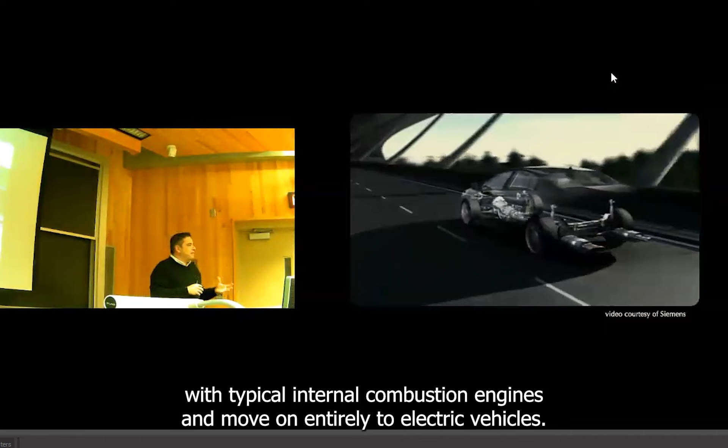Our world is changing, and one particular sector that undergoes significant transformation is transportation. We're about to depart from conventional vehicles with typical internal combustion engines and move on entirely to electric vehicles. This transformation will provide several challenges and also opportunities. We have the challenge to upgrade our existing transportation network with efficient charging stations to charge all these electric vehicles. We have the opportunity to create technologies that can handle the increasing demand of electricity from all these vehicles. We have the opportunity to integrate these vehicles with commercial and residential buildings so that we can eventually have off-grid buildings. And on top of that, we have the introduction of connected and automated vehicles with shared information.

Using this shared information, we can improve the transportation efficiency and also reduce energy. So if you look at all these applications, there is a common theme: we have a cyber component, which is data or information that we use to control the physical entity. So we have a typical cyber-physical system.

So now you might wonder why we need to focus so much on transportation. Well, in 2017, the US alone consumed on average 19.6 million barrels of petroleum, and transportation accounted for 71% of that usage. If you think about it, this is enough fuel to fill up the entire building over two times per day just to propel the vehicles. So you can see the impact of transportation in oil displacement.

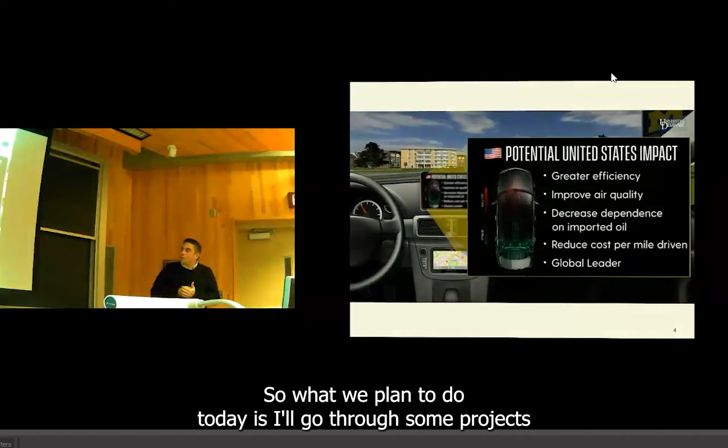Now, with the introduction of connected automated vehicles, we have significant opportunities to use connectivity and automation and improve the efficiency of the vehicles, and so account for this impact of transportation. So what I plan to do today is go through some projects that I have worked on over the past years in learning and control, applying to propulsion systems and also connected automated vehicles.

Through this path, I will try to highlight the challenges of learning and model-based control. And then at the end, I'll try to convince you and make the case that if we combine learning and control, we are better off in this particular case.

Before I get started, let me acknowledge the contributions of my students in the IDS lab. In my lab, we develop control algorithms and theories that we can use to make cyber-physical systems able to realize their optimal operation while interacting with the environment. The focus is mainly on transportation and emerging mobility systems and smart cities. To validate our work, we have built a scale smart city.

This is a 20 by 20 feet, or 6 by 6 meters if you are familiar with SI units. We have about 50 cars, everything in scale 1 to 24. We have cars and drones, and we can use this testbed to go one step further from simulation. We can test some of the algorithms in different scenarios, and prove concepts for different transportation concepts.

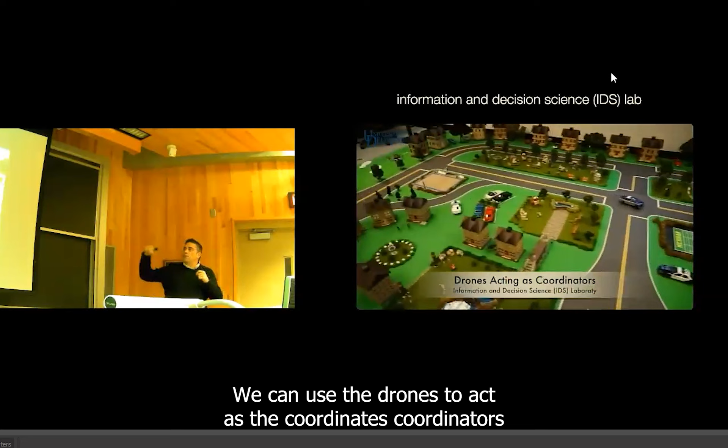For example, we have done coordination of a drone with a car in first and last mile delivery. We can use the drones to act as coordinators in specific scenarios and handle the information from the cars, then use this information to do better controls. So this is a nice testbed that you can use for experiments and train students without having safety concerns.

We have also integrated a driver emulator into the cars. So essentially, we can drive the cars in the city, and we can have an environment of mixed traffic, between human-driven robotic cars and fully connected automated cars.

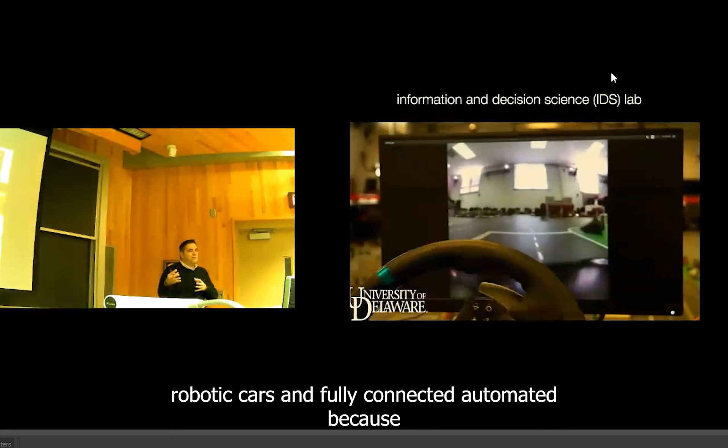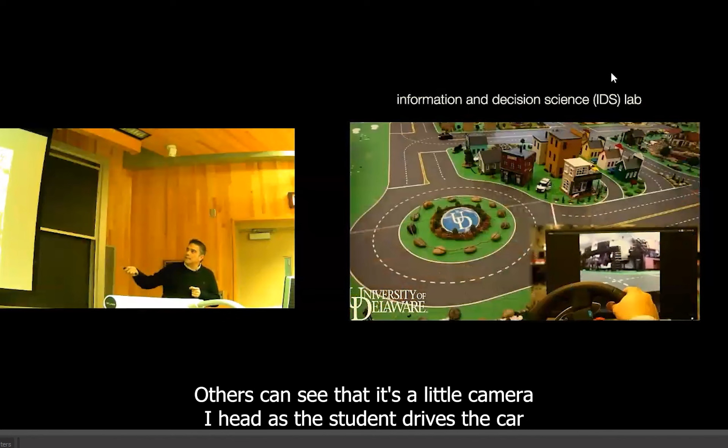The cars have a little camera ahead, so the driver can see through the camera and the monitor what's going on in the traffic conditions. So as you can see, there is a little camera ahead as the student drives the car, and then we can see the environment through the monitor.

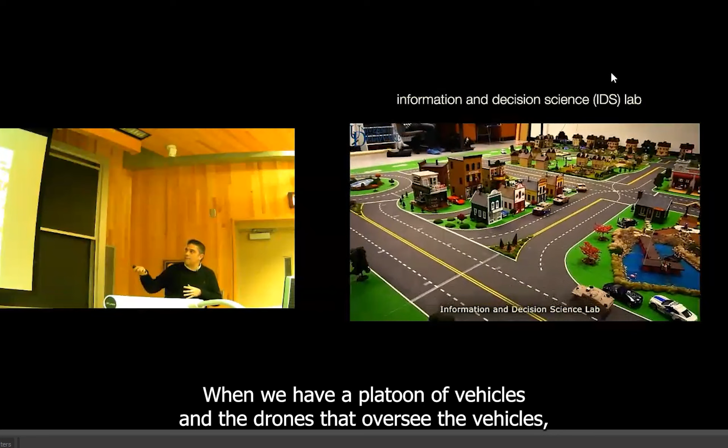We also can use these cars and this testbed to prove some cooperative control for ground and aerial vehicles, like these kind of cases when we have a platoon of vehicles and a drone that oversees the vehicles, collects information from the surroundings, and then reports back to the vehicles.

We have also built a digital twin of the city, a digital replica, the twin city. Eventually we use this with our collaborators so they can have access remotely and do some experiments. And then when their algorithms become mature, they can come and do some physical testing in our scale city.

We also built an app that can replicate shared mobility like Uber and Lyft. So you can download the app, and then you can call one of the cars to come to the origin, and then you can identify an artificial destination, and then we can use this app to validate some of the eco-routing approaches that we develop in the lab.

So eventually you have multiple users assigning different origin destinations, and then you have a little traffic going on, and then you can validate and quantify some of the results that we do.

The city was featured in the IEEE Control Systems magazine last December, so we were pretty happy about this.

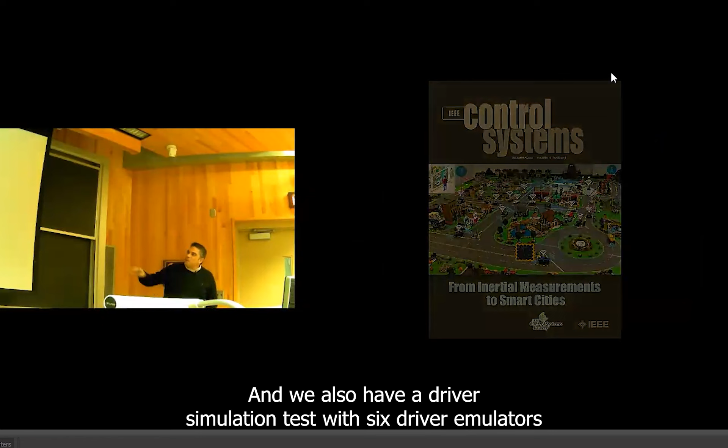We also have a driver simulation testbed with 6 driver emulators that we can use with commercial software to do some very basic simulation stuff. Typically, this is where we started. We started with a simulation, and then moved on to our scale city.

So that was a little bit of introduction and acknowledgement for the work of my students.

Coming back to the technical talk, over the years I have had the chance to work on different problems in transportation. I started with my dissertation when I worked on learning control and how we can make the engine in a vehicle learn its optimal operation with respect to the driver's driving style. And then I moved on and worked on hybrid electric vehicles and plug-in hybrid electric vehicles and how we can develop power management controls to improve the efficiency.

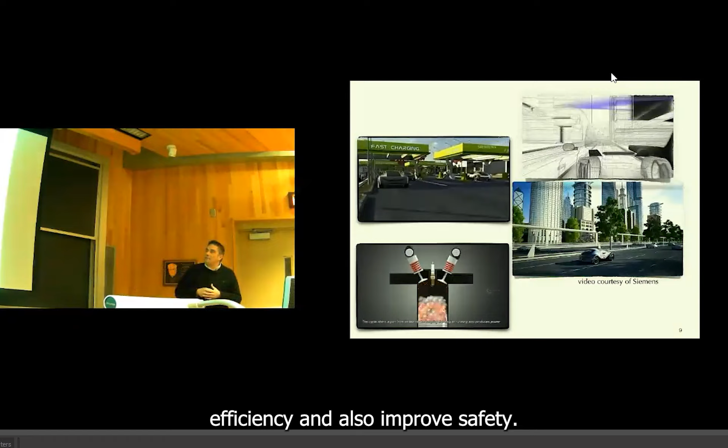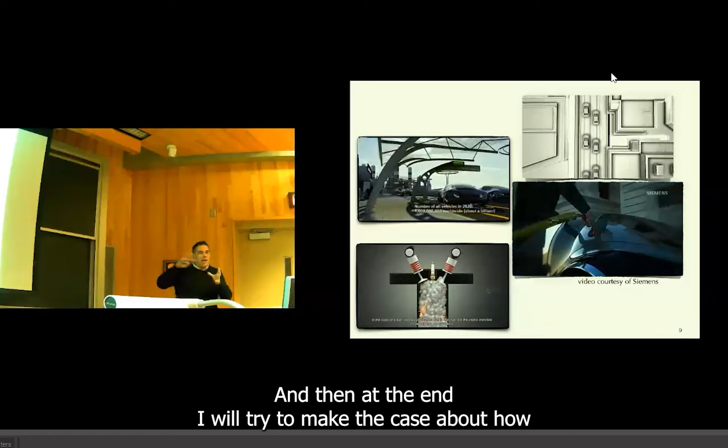So what I plan to do today is go through my journey. And throughout this journey, I will be highlighting challenges in learning and control. And then at the end, I will try to make the case about how we can combine learning and control in those kinds of applications.

So my journey started in 2003 when I joined University of Michigan. I arrived in Detroit in the winter, because in Michigan you can start either in January or in September for graduate school. There was about 11 inches of snow in Detroit, and coming from Greece, it was a big shock for me. So the first thing I had to do was get around the weather, and the second thing was to find an interesting topic for my dissertation.

So I was going through different articles to find an interesting problem, and I came across this question that was very common at that time: why can we not achieve the miles per gallon that are posted on the window sticker of our cars? So I thought this was an interesting question to dig into and understand a little bit more.

So let's see what's going on. When we buy a car, it comes with a window sticker from EPA, and they give you fuel economy estimates for highway driving and for city driving. And although we can almost always achieve the highway miles per gallon estimates, we can barely achieve those corresponding to city driving. So let's see why this is the case.

Now, to understand how engine operation works—and actually William is the right person to ask—we need to look at the engine operating domain with respect to engine torque and engine speed. These colorful contours that you see here are the so-called brake-specific fuel consumption map, the BSFC map. This gives you fuel consumption per unit power, so the lower this value, the better it is.

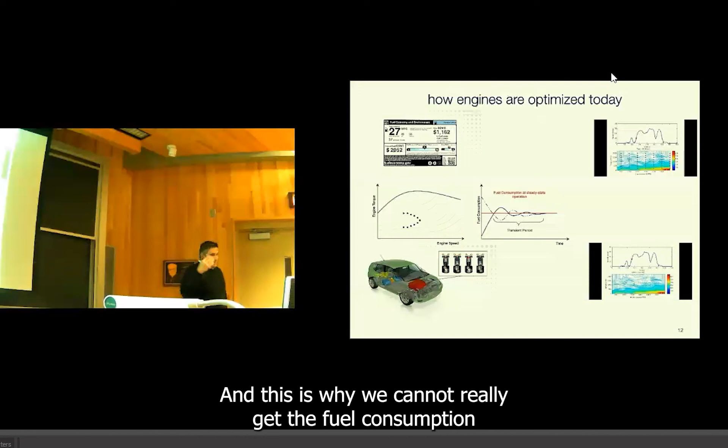Now, if we approach this operating point through a sequence of engine operating points, we get fuel consumption that varies for a small transient period. Moreover, if we approach this operating point from a different direction, fuel consumption is associated with different values. So when we drive the car in a city, we essentially operate the engine in these transient operating points. This is why we cannot really get the fuel consumption estimates posted on the window sticker, because those estimates are based on steady state operating points.

Now, to optimize the engine for all these transient cases a priori is infeasible, right? Just because every driver drives differently, there's an infinite dimensional space of different engine operating point transitions. So you can't really do that a priori. So what I did in my dissertation was take a different approach, and instead of focusing on steady state operating points, I focused on the engine operating point transitions.

I modeled the evolution of the engine operating point as a controlled Markov chain. Then I started learning, as the driver drives the vehicle, the transition probability matrix. Eventually, we came up with a controller that can learn the transition probability matrix characteristic of the driver's driving style, and derive an optimal engine calibration corresponding to that driving style.

So with this approach, as the driver drives the vehicle, the engine captures the driver's driving style through the transition probability matrix and derives the optimal calibration. With this approach, we were able to see an improvement of about 8% in most of the case studies, which was significant, just from calibrating the engine in a different way.

Now, this is the good aspect of the story, but as I promised, I'm going to highlight the challenges here. Once you do this exercise with reinforcement learning techniques, you start from a feasible engine controllable set that you want to explore for optimal values, but eventually you might try some controllable values that may stall the engine.

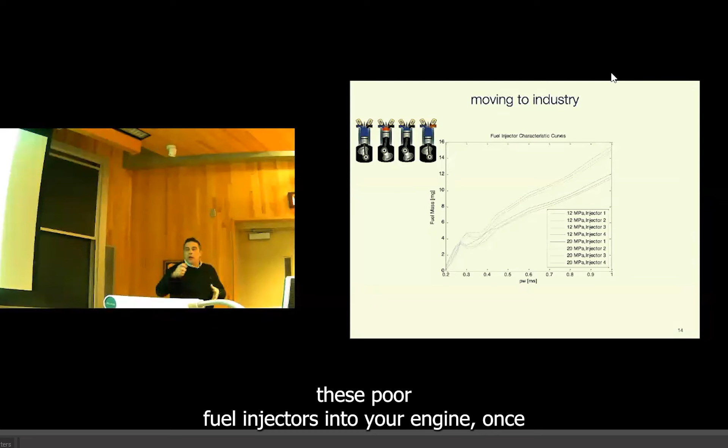These are characteristic curves of a solenoid injector. You have 4 injectors, and you have 4 different injection curves at 2 different cylinder pressures. So you can see that if you have these 4 fuel injectors into your engine, once you command the pulse width, you get 4 different fuel amounts. So you create some instability inside your engine.

So the project was how you can learn these injector curves so that you can precisely inject the fuel that you want to inject. You can think this is a pretty straightforward problem, like system identification - I have this curve, I just need to identify it in real time. Well, the problem is that when you inject the fuel, you don't have a sensor inside the cylinder to measure the amount of fuel you've injected.

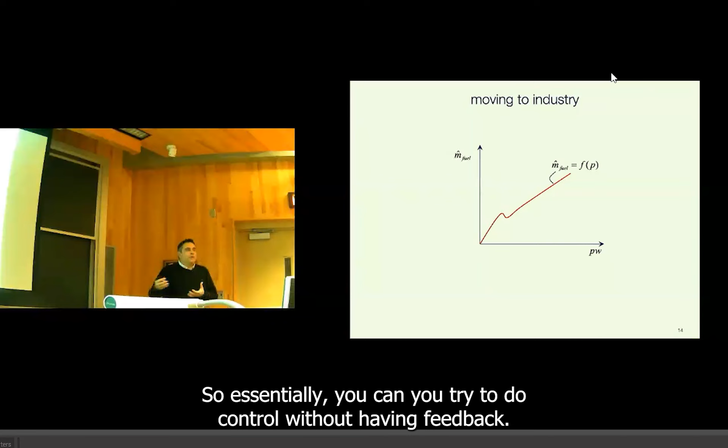So essentially, you try to do control without having feedback. You can only have an air fuel ratio into your engine, and again, you don't have individual air fuel ratio in the cylinder. So eventually, what I end up having is a bunch of offline data for fuel injectors - data with pulse width and fuel, but experimental data, not data from the engine.

And then I use supervised learning, and I created a type of controller. But again, I could not rely entirely on this data with supervised learning, because the injector behaves differently inside the engine versus an experimental setup. So eventually, I had to adapt the supervised learning with neural networks, with some sort of adaptive control that can account for this type of instability.

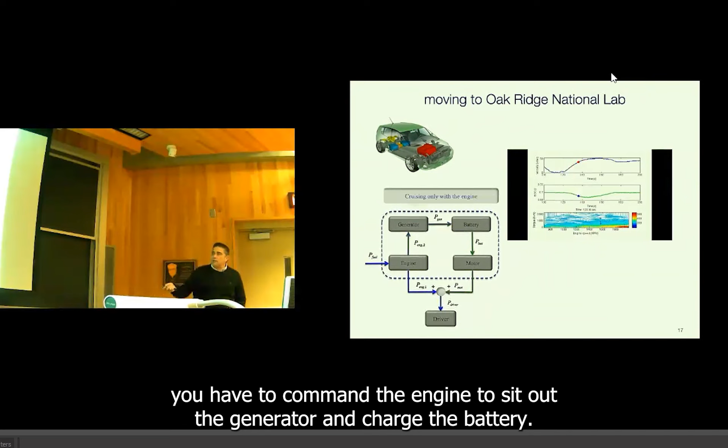With a hybrid electric vehicle, in addition to the engine, you have a motor, generator, and battery that can power the vehicle separately or in combination. As the driver asks for power, it can be delivered through the engine only, the motor only, or a combination. If you use the motor, you deplete the battery, so at some point you have to command the engine to send power to the generator and charge the battery. There is a multiple decision-making process and a lot of degrees of freedom available to optimize the whole powertrain system.

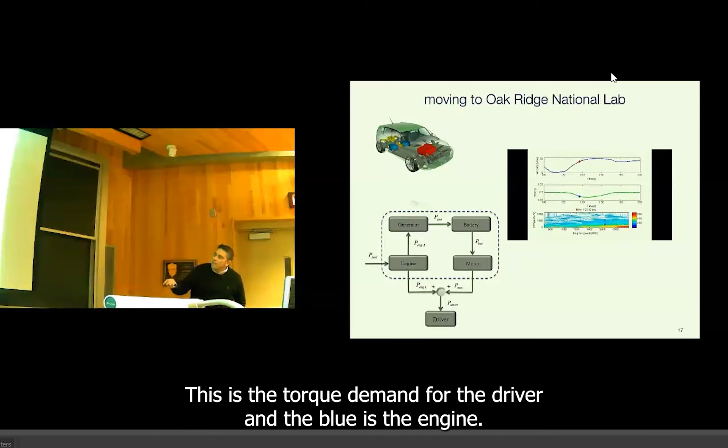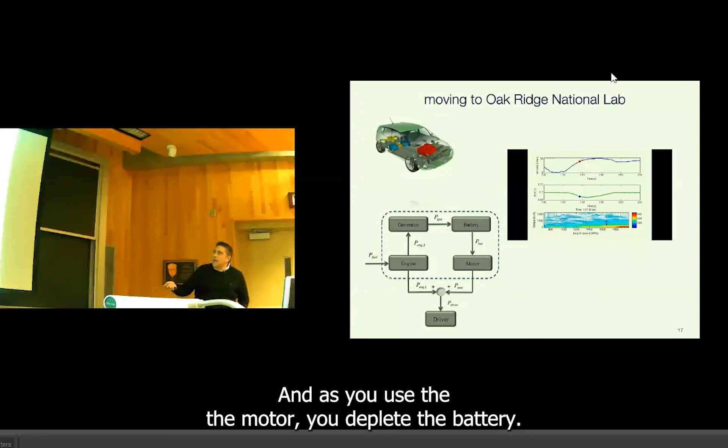In this map, you can see the BSFC map I discussed before. This point is the torque demand from the driver, the blue is the motor torque, and the magenta is the engine torque. You can see how the torque demanded by the driver is delivered through the motor and the engine, and as you use the motor, you deplete the battery - this is the state of charge as you accelerate. So there is a somewhat complex decision-making process inside the powertrain needed to optimize the efficiency of the power.

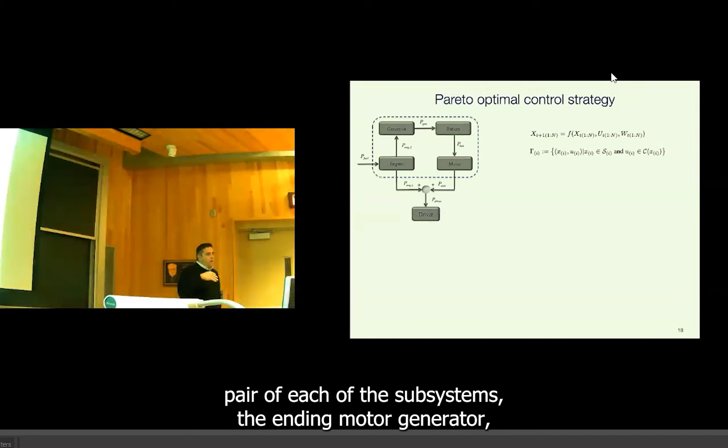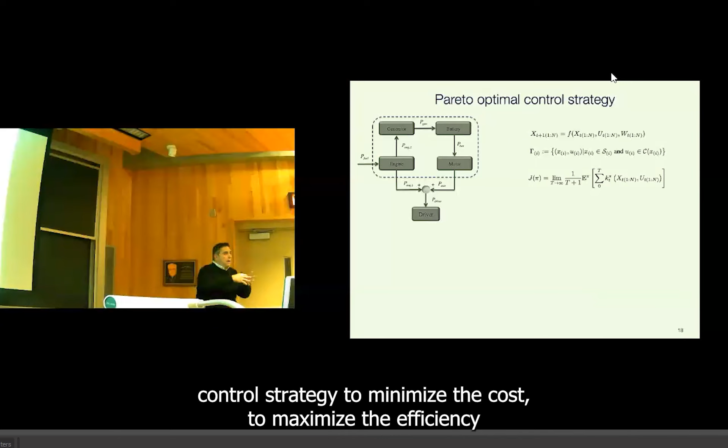So the way we approach this is first we identify the feasible state action pair of each of the subsystems: the engine, motor, generator. Then you can use multiple criteria to formulate your problem. Typically, we use the total cost criterion, which is to derive the optimal control strategy to minimize the cost or maximize the efficiency for a given time period, which is the driving cycle.

In this case, I use the average cost criterion, which means that I want to optimize my powertrain for the long term, as the driver drives the car for days, weeks, and months.

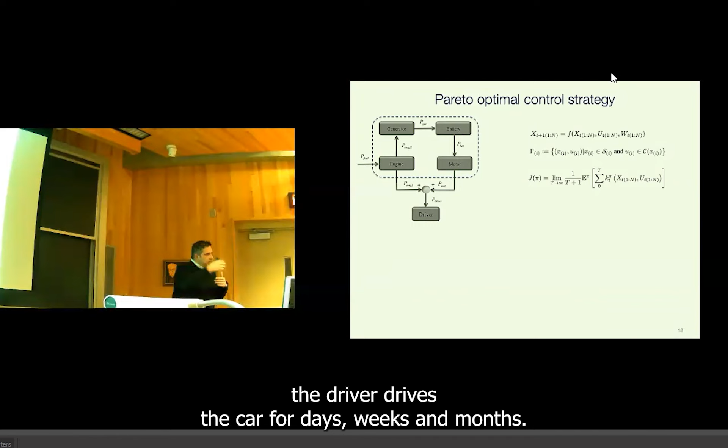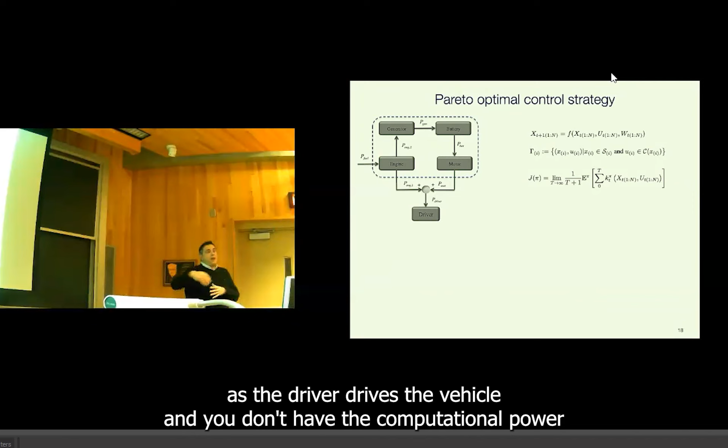Now, to solve this problem in real time is kind of infeasible, just because you need to solve this problem for any different driver as the driver drives the vehicle, and you don't have the computational power on board to do that kind of thing.

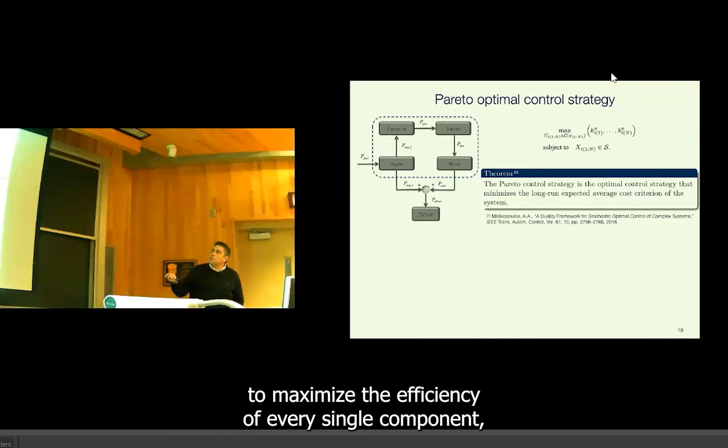So what I did in this problem, I reformulated it and created a multi-objective problem where the objective is to maximize the efficiency of every single component: the engine, the generator, motor, and the battery.

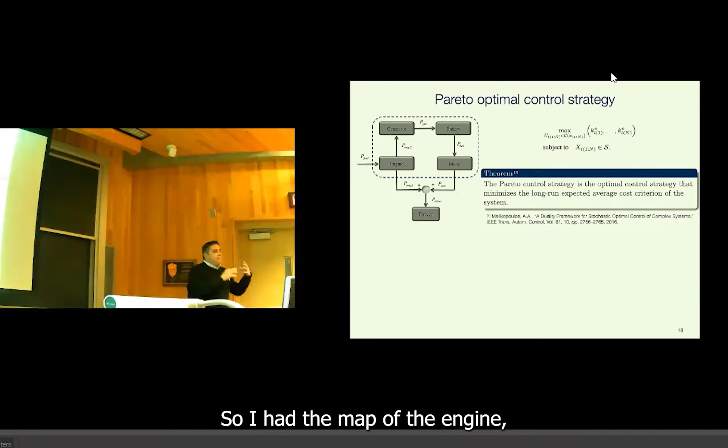And I solved this problem offline. I had the map of the engine, the BSFC map, and the maps of the motor and the generator. So I solved this problem and created the Pareto solution of these different cases for every single realization of the engine torque demand.

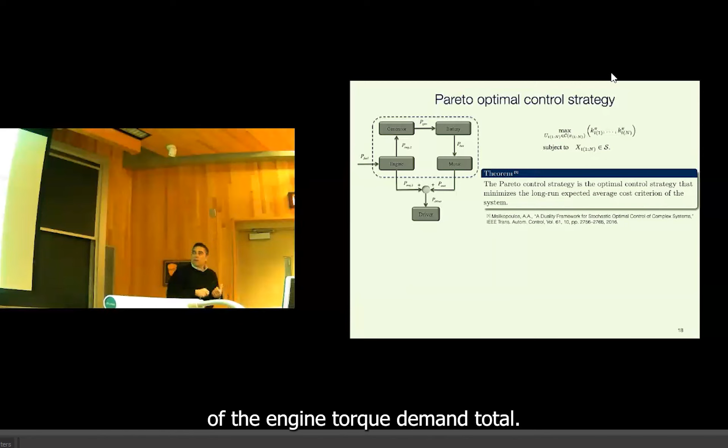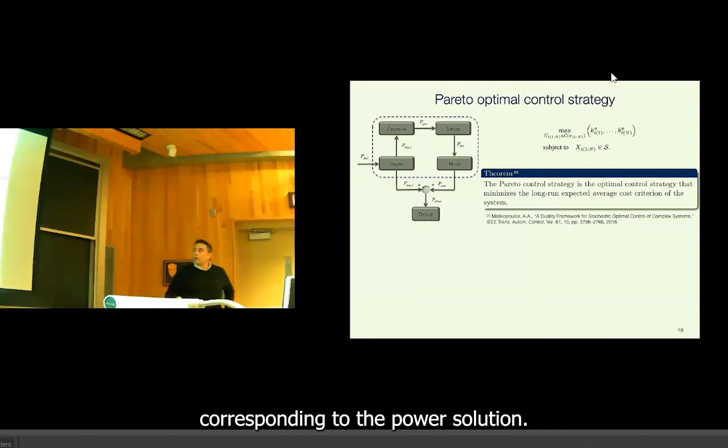Then I took this map and put it in the model, and I was running the model by interpolating the values corresponding to the Pareto solution. And I showed, at least theoretically, that if you operate under this Pareto optimal solution, you essentially minimize the average cost criterion, not the total cost criterion.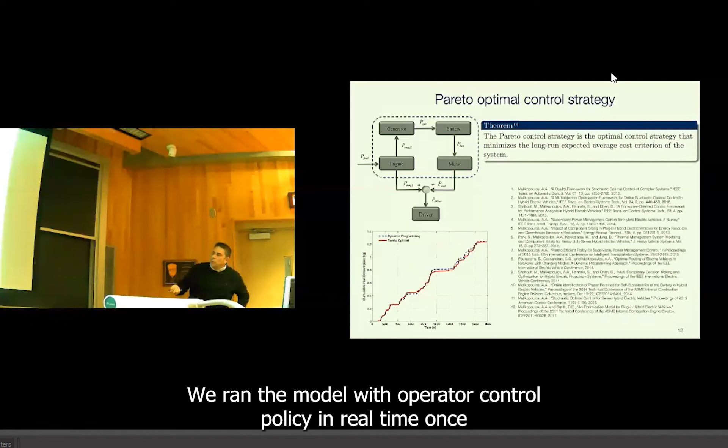We did some simulation studies as well. We ran the model with a Pareto control policy in real time once, and we got some fuel economy results.

Then we used reinforcement learning to mimic the dynamic programming solution. We essentially took the same model and ran it over the same driving cycle again and again until it converged to the optimal strategy corresponding to the dynamic programming. We saw that we get pretty much the same solution with some numerical tolerance.

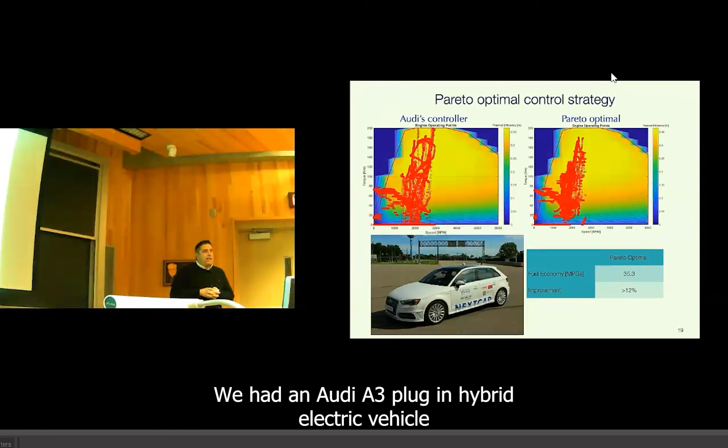Now, we also went and did some experiments with our demo vehicle. We had an Audi A3 plug-in hybrid electric vehicle that was part of the ARPA project completed a couple of years ago. And we compared the solution with a Pareto controller to the Audi's controller.

This was an experiment that our collaborators, Bosch, did. So you see, this is the BSFC map. This column corresponds to the thermal efficiency, so you need to have it as high as possible.

You can see that in the case of the Audi's controller, the engine operating points are spread out, right? Although with the Pareto control policy, we've squeezed all of them into the higher efficiency regime. This is why we got more than 12% improvement in the powertrain compared to the solution from the Audi's controller. So that's kind of how we could validate what we were expecting from the theory.

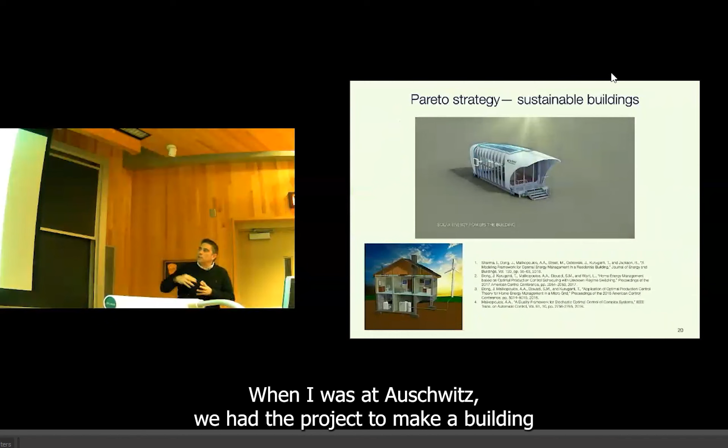So we went ahead and implemented this in a different problem. When I was at Oak Ridge, we had a project to make a building off-grid, dispatching the electricity demand from the residents to different available renewable resources, like wind.

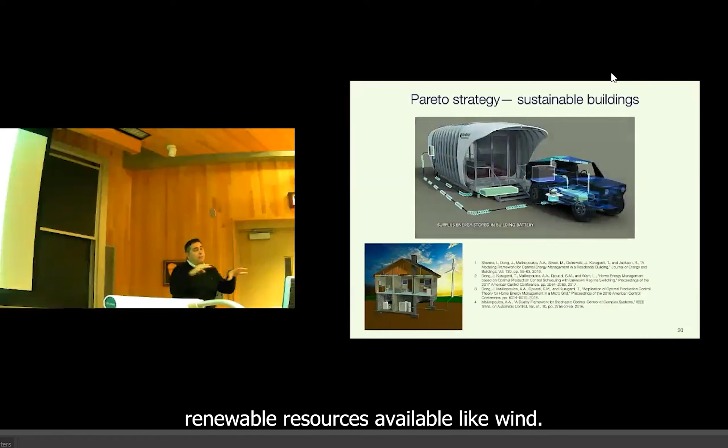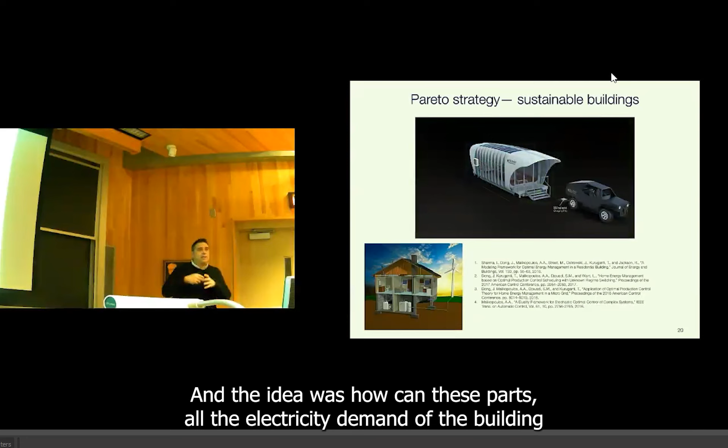You have photovoltaic panels. You also have a car integrating, an electric car integrating with a building. And the idea was how you can dispatch all the electricity demand of the building into these resources and make the building not require any electricity from the grid.

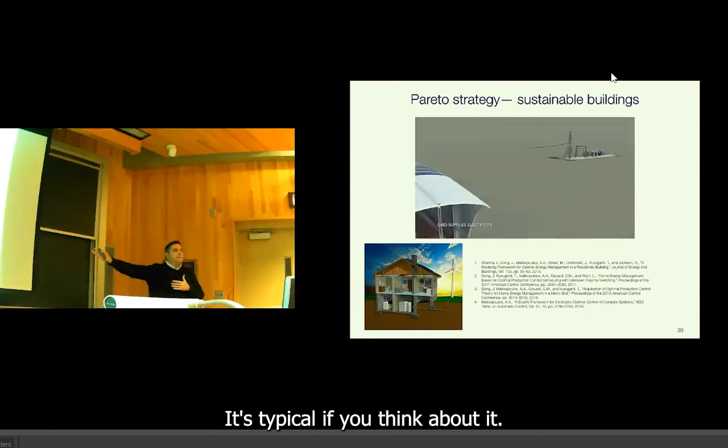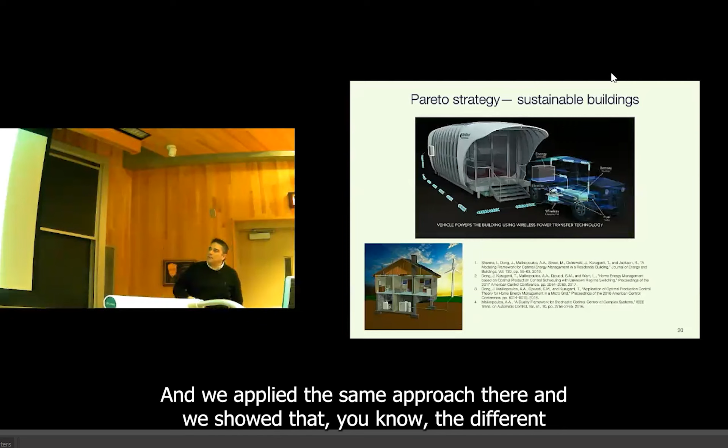If you think about it, this is very similar to the hybrid electric vehicle, right? Instead of asking for torque, you're asking for electricity, and you dispatch this. We applied the same approach there, and we showed different types of results.

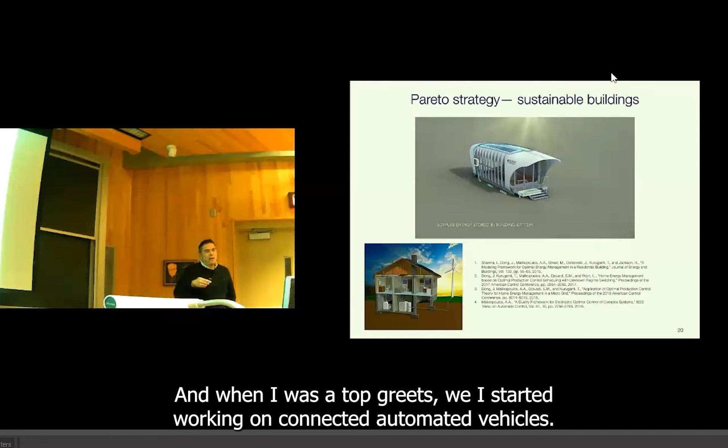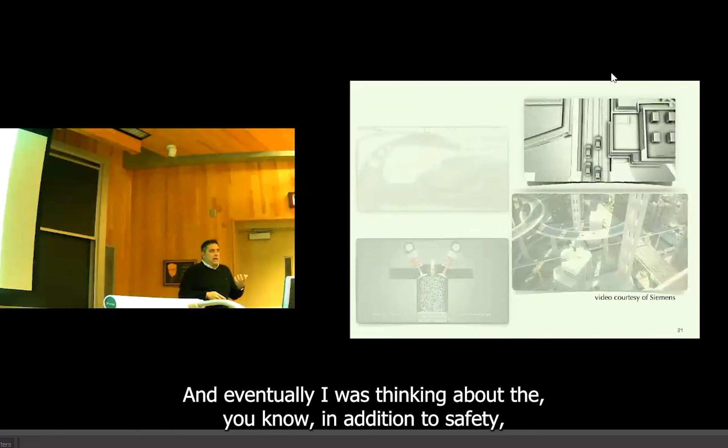Then, at that time when I was at Oak Ridge, I started working on connected automated vehicles. I saw the opportunity when I was working on the hybrid electric vehicle that if you have additional information from the traffic, you might be in the position to do better controls. Eventually, I was thinking that in addition to safety, you can use this shared information from all the vehicles and sort of avoid situations like congestion.

So the question was, if I use this information, can I coordinate the vehicles in intersections, in roundabouts, in merging roadways, and avoid the stop-and-go driving?

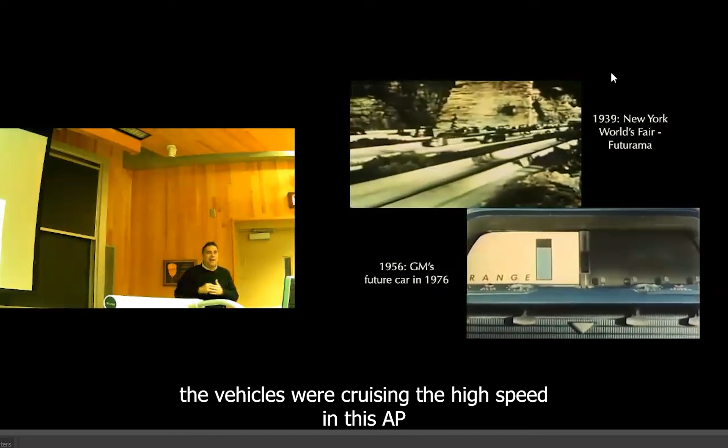If you think about it, this was not a new idea. In 1939, in the New York World's Fair Futurama, they had a big model of the world, and one big portion of that was about transportation, and they envisioned how transportation would look like in the future. They envisioned a very efficient highway system where vehicles would cruise at high speed safely. In 1956, GM featured the car of the future, 20 years into the future.

They envisioned in 1956 a car that would be completely autonomous. They had this gentleman represent what we call today GM OnStar. Essentially, the OnStar gives directions to the driver, the driver gets to the dedicated lane, and from that point on the car is completely autonomous and the family goes to Chicago. They show the kind of luxury benefits of having a fully autonomous vehicle.

Now that was in 1956, and it's 2023, and we still kind of have just a vision about how autonomous cars would look like, which speaks to the complexity of these problems. We're getting there, but we still have a way to go. So in this movie, they showcase all the types of benefits you can have if somebody else is driving the car for you.

So long story short, over the last few years we have worked on control algorithms, model-based control, that we can use to coordinate vehicles in intersections, in multiple intersections, in roundabouts, and so forth. Let me take the time to go through the problem and show you what's the challenge in this case when we do model-based control.

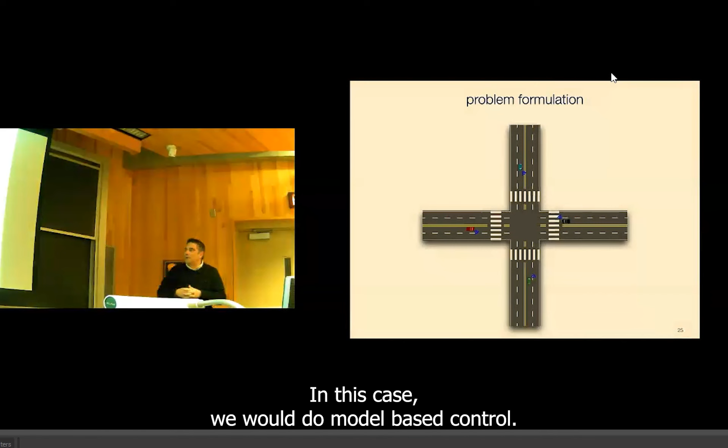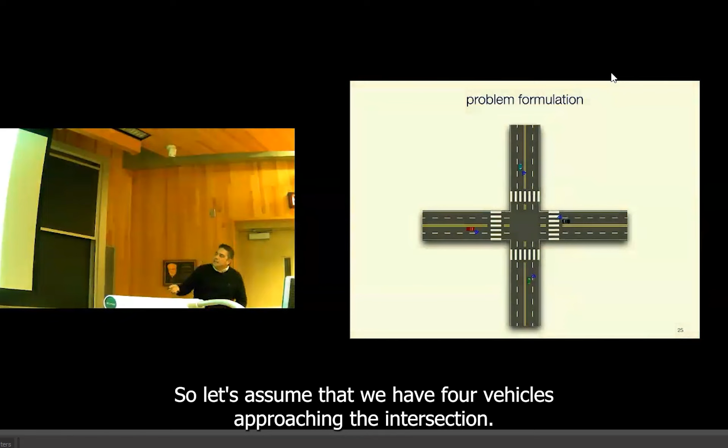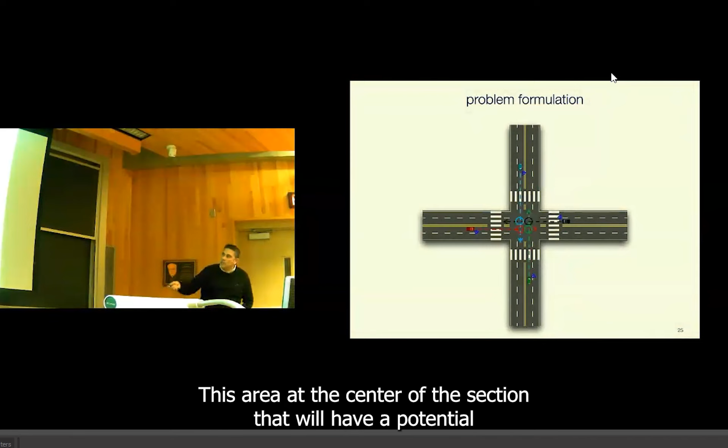I'm going to refer to an intersection, but the analysis here can apply to any other traffic scenario, like a roundabout or merging roadway, or you name it. Let's assume we have 4 vehicles approaching the intersection. If they keep cruising, eventually they will have a collision at the center of the intersection. This area at the center, where we have a potential lateral collision, is called the merging zone.

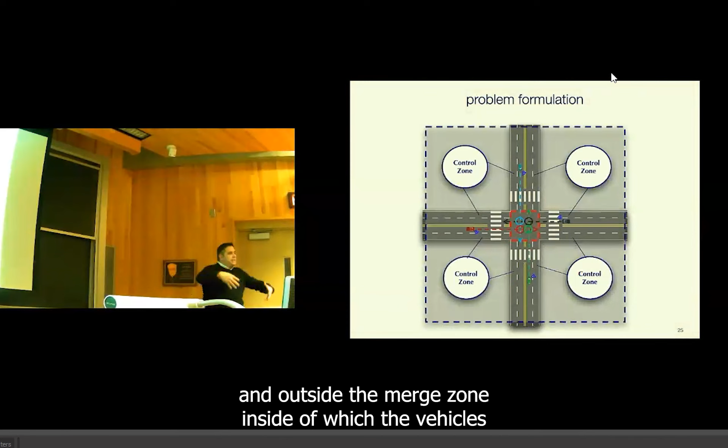We define a control zone around the intersection and outside the merging zone, inside of which the vehicles can communicate with each other and exchange information. So the problem is the following.

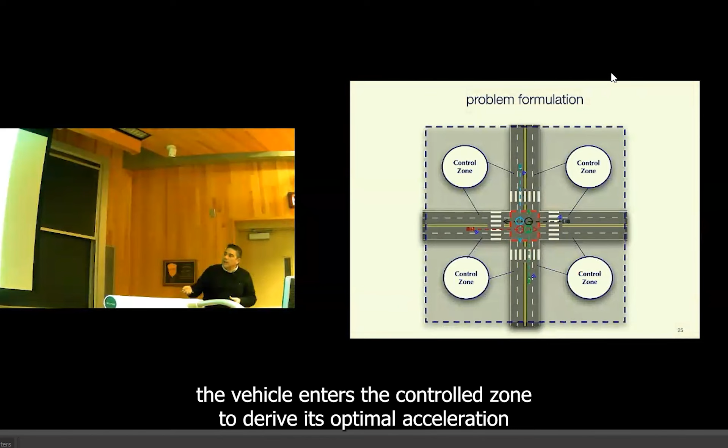If we assume that all the vehicles are connected and automated, once the vehicle enters the control zone, it needs to derive its optimal acceleration and deceleration so that it can cross the intersection and exit the control zone on the other side without collision and with minimum fuel consumption possible.

So let's take a closer look. We have the vehicle. At the time it enters the control zone, it has to derive the timing for entering and exiting the merging zone, and also the time it will exit the control zone. Once it fixes the times, it has to derive an optimal acceleration, deceleration all the way through, so it can cross the control zone without stop-and-go driving and without collision.

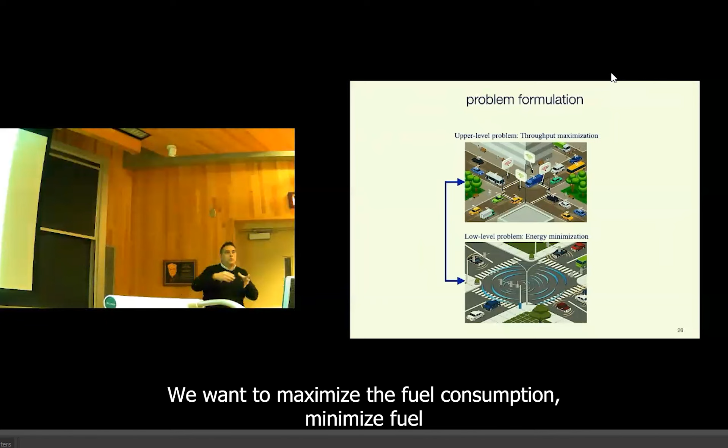Now, if you think about it, this is a 2-level problem. In the upper level, we want to find the optimal timings for crossing the merging zone so we can maximize the throughput of the intersection. In the lower level, we want to minimize fuel consumption, maximize fuel economy, for these given times.

So in our approach, first we model each vehicle as a double integrator, where P is the position of the vehicle starting from the entry of the control zone, V is the speed, U is the control input (acceleration, deceleration), and S is the inter-vehicle distance from the preceding vehicle — the distance from vehicle i to the preceding vehicle k.

Now, somebody might argue here: you model the car as a double integrator model, and this is far away from the dynamics of a true vehicle. That's true, that's a fair argument, and that's the disadvantage of model-based control. You have to use a very simple model just because you need to derive your control strategy in real time.

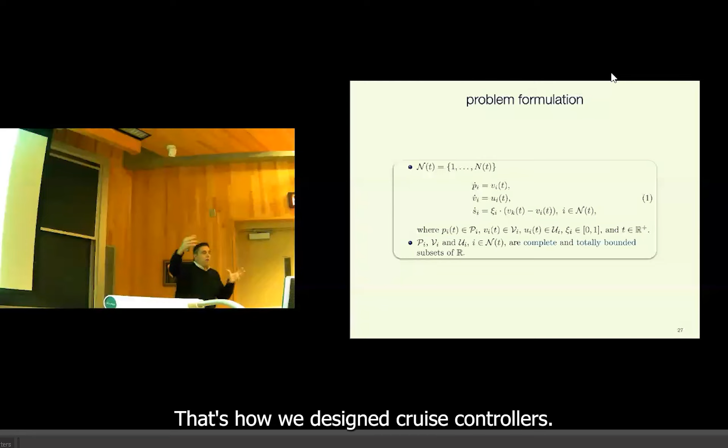What we typically do now is use the double integrator model to derive the optimal acceleration, deceleration — an optimal trajectory, essentially. And then you use a lower-level PI or PID controller to track this trajectory. That's how we design cruise controllers. So you bypass this issue with this trick.

This is one of the highlights I promised about model-based control. There's a discrepancy between the model you use and the real system, so you don't expect the optimal solution to be the true optimal solution eventually.

The next step is to define the upper bounds of the control and state. Every vehicle has maximum acceleration and braking capability. We need to incorporate this in our framework, and also impose some speed limits inside the control zone.

Then we address the safety constraints. Each vehicle i needs to maintain at least a safe distance delta from the preceding vehicle. This safety distance is also a function of the speed of the vehicles, because the higher the speed, the higher the distance you need to maintain from the preceding vehicle.

And then we have the lateral collision safety constraints, which essentially guarantee that we don't have lateral collision inside the merging zone between the vehicles. Once we set that up, we are ready to formulate a low-level optimization problem.

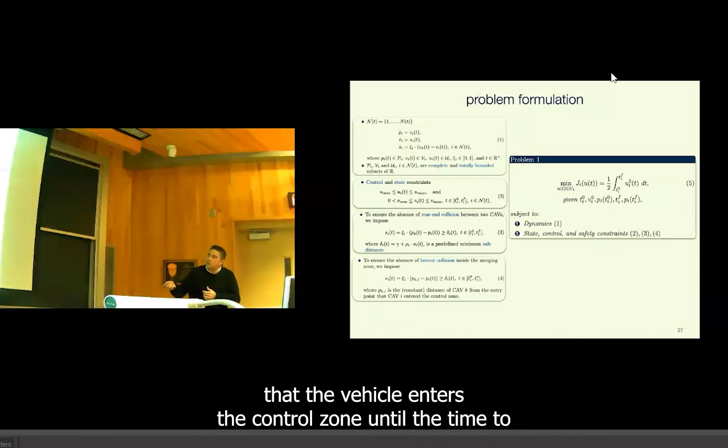Formulate a low-level optimization problem, which is minimizing the L2 norm of the control input from the time Ti0 that the vehicle enters the control zone until the time TIF that the vehicle exits the control zone.

Now somebody might say, hey, you said you're going to minimize fuel consumption. How is this related to fuel consumption? Since you minimize the L2 norm of the control input, this doesn't have energy units.

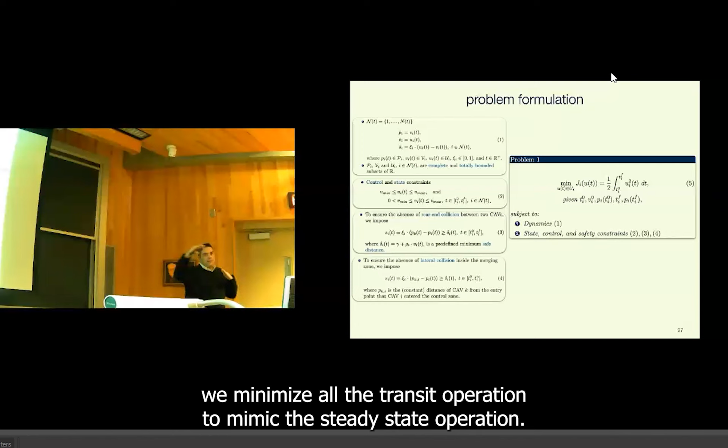Well, if you remember from the BSFC discussion before, when you minimize the control input, you minimize acceleration. If you minimize acceleration, you minimize transient engine operation. And if you minimize transient engine operation, you mimic steady state operation, which is how you get the fuel consumption benefits. So eventually, by asking to minimize the L2 norm, you mimic steady state operation, and this is how you get all the benefits.

Now, to solve this problem, you formulate the Hamiltonian analysis and the Hamiltonian function, and then if none of the state, control, or safety constraints become active, you have a nice closed form analytical solution where the optimal control input is an affine function. The optimal speed is a quadratic polynomial, and the optimal position is a cubic polynomial of time.

This is the case when none of the state, control, or safety constraints become active. You have a very nice closed form solution that you can implement in real time. Now the problem is if any of the state, control, or safety constraints become active. In this case, things get complicated.

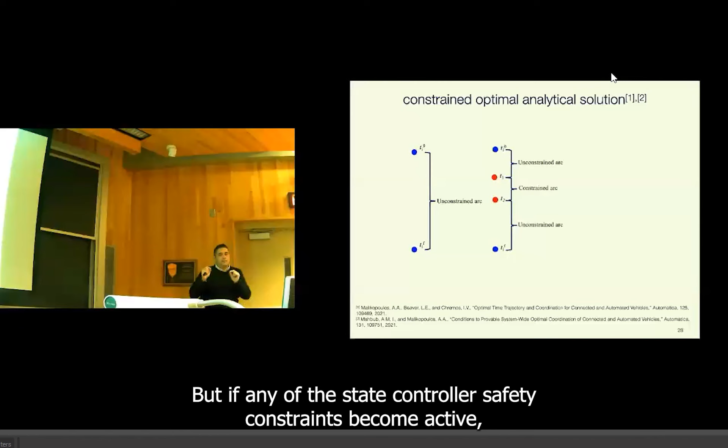So this is the case when none of the constraints become active, we have a very nice closed form analytical solution. But if any of the state, control, or safety constraints become active, then what we need to do is piece the constrained and unconstrained arcs together to satisfy Euler-Lagrange equations along with the boundary conditions and interior conditions at the corners, the junction points T1 and T2, which leads to a set of highly nonlinear algebraic equations that we need to solve simultaneously.

And this implies that we need a numerical solution, which means we cannot really implement this in real time on board the vehicle, right? So this is how the whole approach falls apart. If you cannot really implement this in real time, then there's no point to go any further.

And if you get a solution, this solution might hit another constraint down the road. So you need to repeat this process.

Just to give you a flavor of the complexity, let's assume the rear-end constraint becomes active. If this becomes active, it imposes discontinuities in the influence function of the Hamiltonian analysis. You end up with a set of algebraic equations that you need to solve simultaneously, so you can see the level of complexity added to the problem.

So the way to bypass all of that is the following. The whole idea is: can I derive a solution that eventually doesn't activate any of the state, control, or safety constraints? That was the idea.

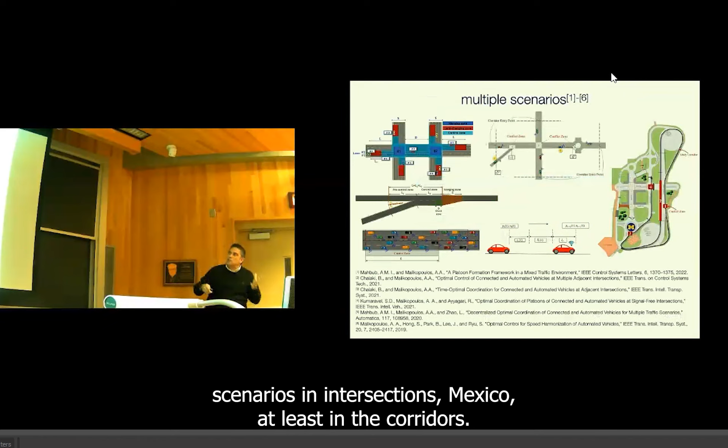We applied this approach to different scenarios: intersections, merging roadways, and corridors. Let me show some results. The first experiment was in our scale city at an intersection, where different vehicles enter and derive optimal time trajectories, allowing them to cross the intersection without stop-and-go driving.

And then we also include a corridor in our scale city that included an intersection, a roundabout, and a merging roadway. These are about 15 vehicles. You can see how the vehicles going through the roundabout, the intersection, and the merging roadway, and they all coordinate. Now, in this problem, we have three different control zones, independent with each other.

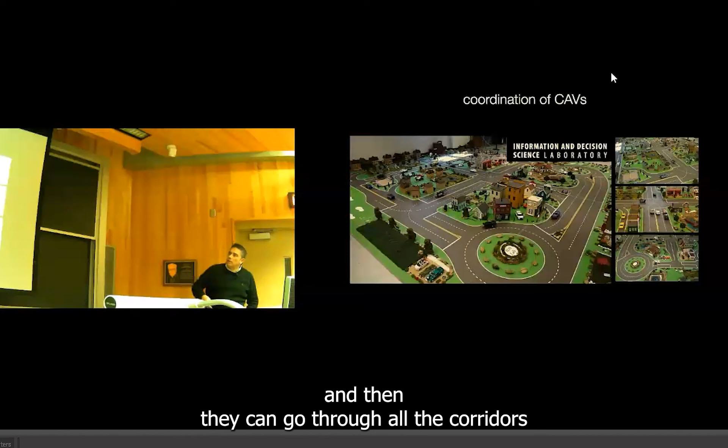And then they can go through all the corridors without stop-and-go driving. We also did some experiments in M-City with our demo car. That was part of the ARPA-E project that was completed a couple of years ago, led by UD.

Our collaborators were Bosch, the industrial stakeholder, University of Michigan, and Oak Ridge National Lab. And the goal of this project was to improve the efficiency of the Audi by at least 20%. William was leading another ARPA project in the same team.

So we did experiments in M-City. In M-City, they have augmented reality. So essentially, you have the car running in the field, and then they create a bunch of virtual cars that broadcast with a physical entity, so you can have your car doing experiments and interacting with virtual cars.

As you can see here, you will see the Audi in M-City, and this is the virtual simulation when you have the Audi and all the virtual cars. At the top of the video is the baseline scenario without connectivity and automation. At the bottom is the video with connected automated vehicles and the Audi running with our control algorithms.

As you can see, the Audi comes through the ramp and interacts with the virtual vehicles. There's no vehicle, of course, but these are the virtual vehicles, the black vehicles. There's a gap it can switch into and get into the merging zone without stop and go driving, although in this case there's a black virtual vehicle ahead that blocks the Audi from proceeding.

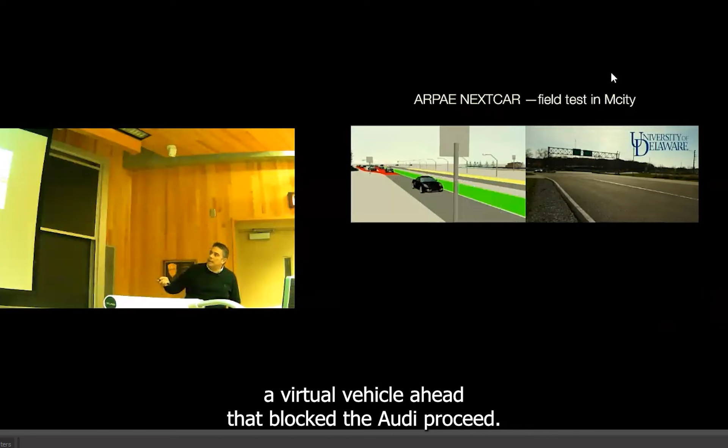So it's trying to find an appropriate gap to squeeze in, what we encounter today, right? And then, of course, the Audi can get in. So with this setting, we were able to do experiments and validate the control algorithms without safety concerns.

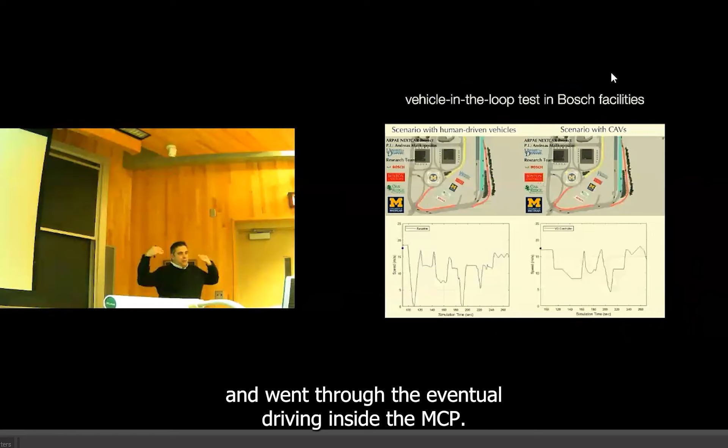We also did some experiments in Bosch Farmington Hills facilities. Eventually, we put the Audi in the chassis dyno and went through virtual driving inside M-City. On the left, you can see the baseline scenario without connectivity and automation, and on the right is when the Audi and all the vehicles run with our control algorithms. As you can see, the Audi in this particular case has a lot of stop and go driving because it has to come to a full stop at some point.

Although on the right, we have eliminated all the stop and go driving just because the vehicles can coordinate and cross the merging zones without stop and go driving. So eventually, by eliminating this, you have sort of translated city driving to freeway driving. And this is where you get the benefits, ranging from 13% all the way to 34%.

Now, you might think these might be high values, but if you compare the miles per gallon of your car between highway and city driving, those are the differences essentially. So by eliminating stop and go driving, you get the benefits of having freeway type driving.

So we've seen three different problems so far. We've seen the model-based control that we use for the connected automated vehicles problem, and there's a discrepancy between the model and the actual system, as we discussed. I had to do the trick with a PI controller—I derived the optimal acceleration using the double integrator, then used the PID controller. So the bottom line is that model-based control cannot facilitate solutions with performance guarantees.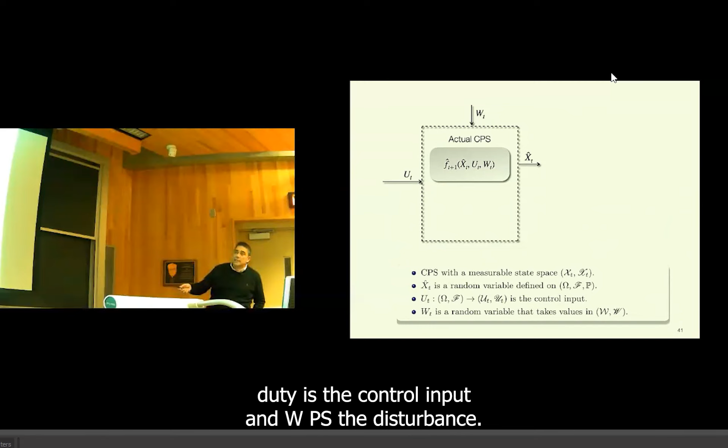Let's assume that we have a system. This is the actual CPS. Xt hat is the variable of my actual CPS, ut is the control input, and wt is the disturbance. All these are random variables defined in an appropriate probability space.

And then we have some also noisy output. Xt hat is the state, and zt hat is the noise, the error of my instrument that I use to measure the output. Now the problem, given this actual CPS, is to derive the optimal control strategy that minimizes the total expected cost.

And as I said, we can't really solve this problem just because we don't have the true dynamics of the system. We need to use a simple model to do that.

Now we use the simple model, and then we establish an information state, which is nothing different but the conditional probability distribution of the state of my model and the actual state of my system, given all the data of my model. Now, if I can show that this information state does not depend on the control strategy...

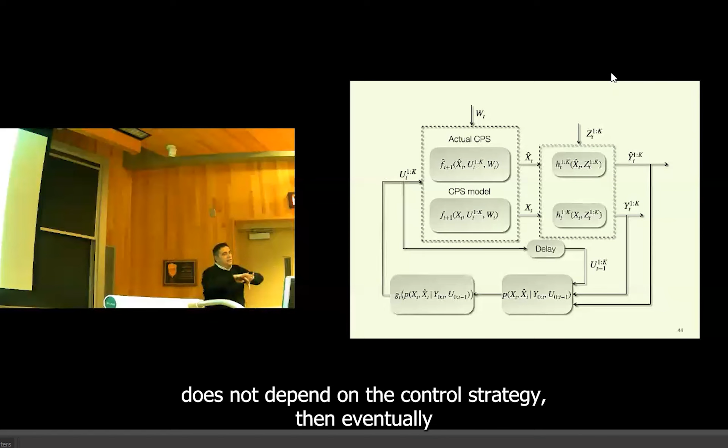...then eventually I separate the control from the learning, and then I can use this information state to derive my optimal control strategy in real time, offline, using the model, just because I have shown that this is separated.

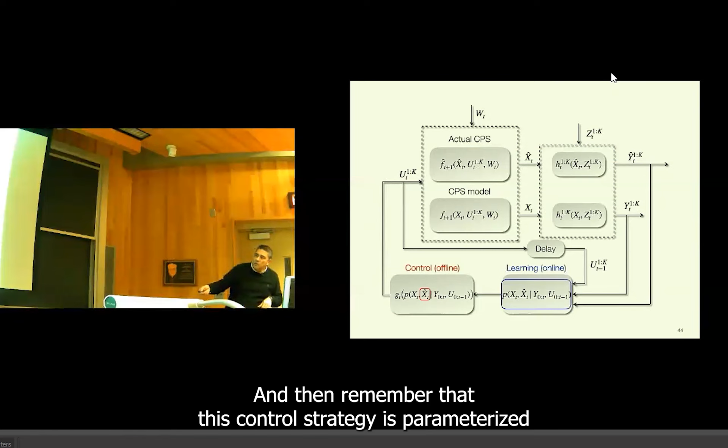And then once I derive the optimal control strategy offline, I can apply it to my model and my actual CPS. Remember that this control strategy is parameterized with respect to all the values of the actual CPS. I can use this to learn the information state online.

So this is recent work in progress, and we are trying to implement this in some transportation mobility systems. We eventually believe that this approach can help us address applications when you have data of a dynamic nature that is added to the system gradually and not altogether in advance.

So instead of relying entirely on supervised types of approaches, you can use this combination of learning and control, derive your optimal control strategy offline by knowing what's going on under the hood, and then leave some of this task online to use learning and complete the work.

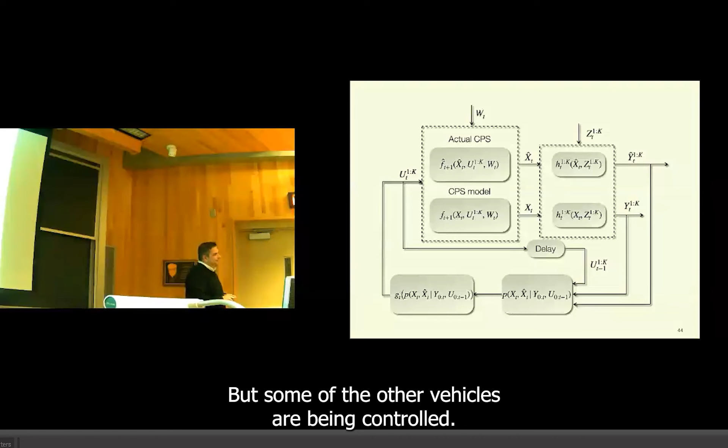Your work on vehicle control to pass through intersections is very interesting. What happens if some vehicles are manually driven and you don't know what they'll do, while others are being controlled? Is there a way to handle that? That's a great question. So yes, what I showed today implies that all vehicles are connected and automated.

But with human-driven vehicles in a mixed traffic setting, things get complicated because you don't control them. So we've used Bayesian approaches: instead of a single trajectory, we have a tube, an interval, inside of which we have confidence that none of the vehicles will intervene. We observe the trajectories of the human-driven vehicles, collect data, quantify the uncertainty, and reduce this tube over time. With Bayesian inference we translate this into a robust optimization problem, collecting data from human-driven vehicles to build confidence as we go.

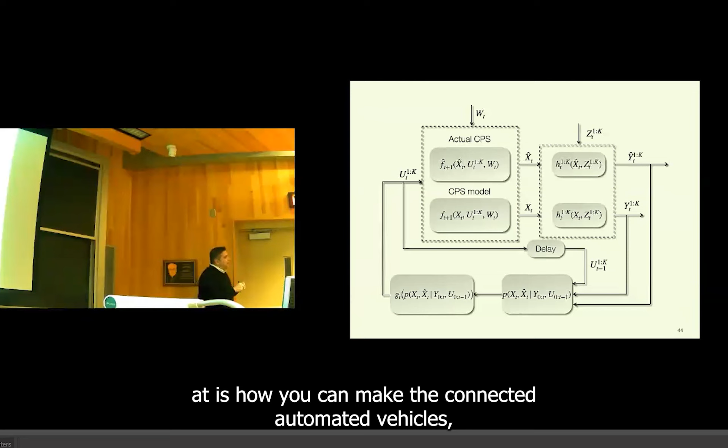Of course, if you do this at an intersection, the whole process is very fast—just crossing the intersection—so there are challenges there too. Another approach we've looked at is making connected automated vehicles behave in a way to create platoons of vehicles.

So a CAV creates a platoon of human-driven vehicles, and then we use the CAV to control the platoon, acting as the lead—decelerating and so on. Every platoon has a CAV lead, and you control the CAVs. But if you command the CAV to accelerate, you don't have guarantees the human-driven vehicles will accelerate as well. You can assume a car-following model, but that's not truly a human-driven model—it works in simulation but might not work in reality.

So with a completely signal-free intersection, we can't be sure a driver will be willing to cross without coming to a full stop. So we consider intersections with stop signs and how to create a gap so the human-driven vehicle always has a clear path to cross. Bottom line: this is a much more challenging problem. We've benchmarked the solution, but as you add human-driven vehicles, the benefits fade away. Okay, thank you.